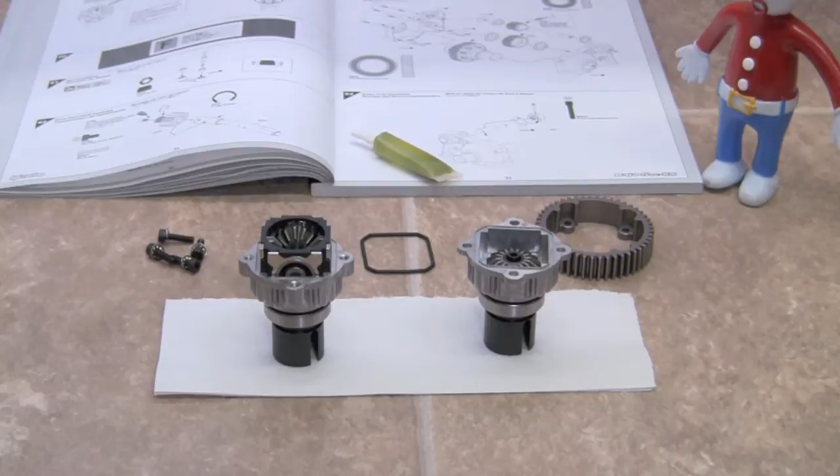Step number 59, which is filling the diff and putting it together and screwing it together. This can get messy, and sometimes if you do it right, it's not that bad.

First thing we want to do, out of experience, is make sure that our plugs are in. Nothing like filling up a diff and having it leak all over the place because you forgot to put the plugs in. Second thing we're going to do, just like with any other rubber gasket, is lubricate it. You can use your diff fluid or you can use some green slime.

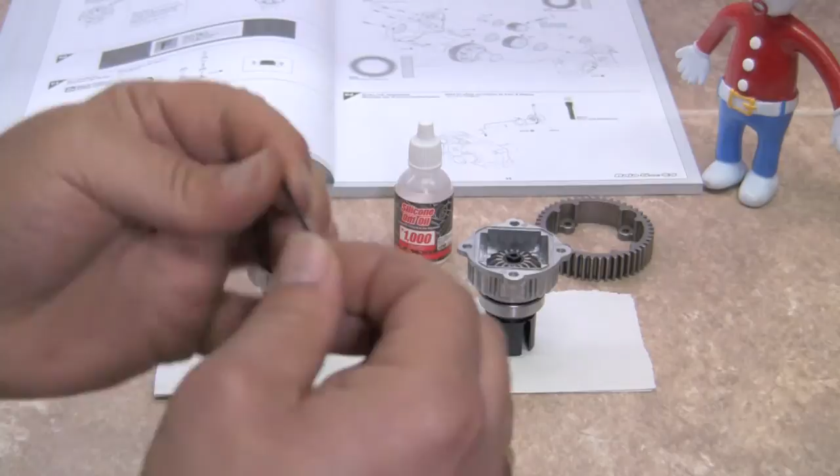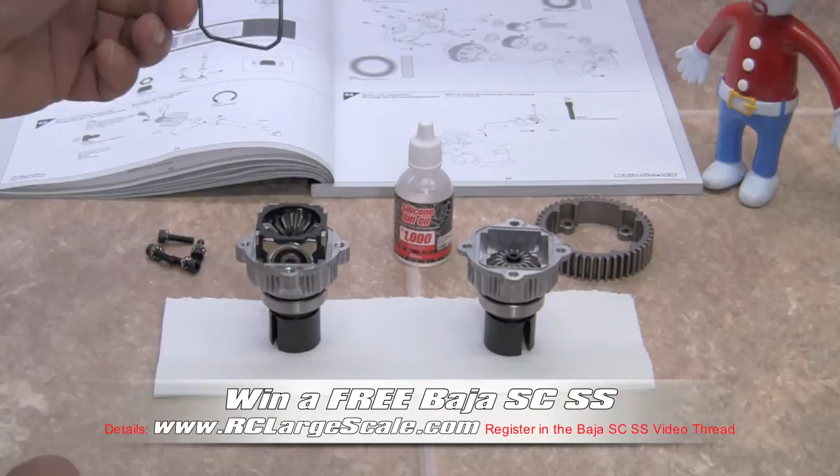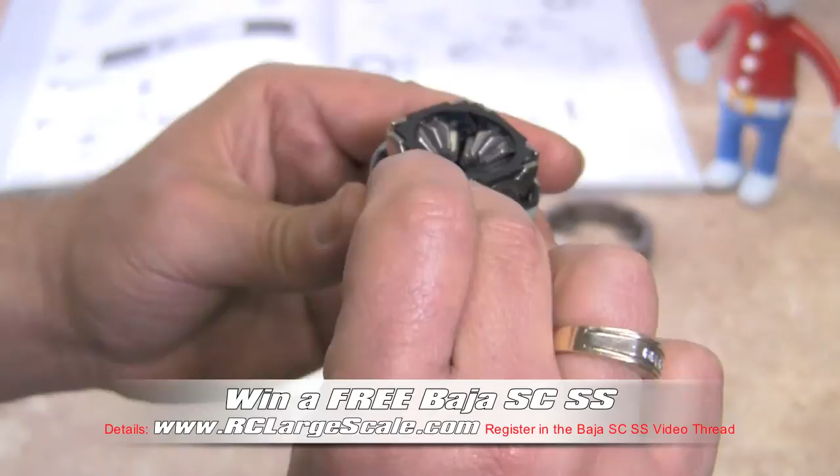We're going to go ahead and lube it up just like so. And as long as we have it in our hands, let's go ahead and lay it over the box, and it's going to drop down inside the little groove. What you want to do is make sure that it's actually down inside that groove properly all the way around.

The green slime or your diff fluid will actually help glue it into place. We may have to revisit that later, but we'll put it on.

I've gone ahead also, because our hands may be greasy, and I've put the little lock washers on our bolts, and there's 4 of those. We've gone ahead and inserted those, gotten out our diff fluid, and we're also going to need some blue Loctite. Just to save time again, I'm going to go ahead and just put a little dab of Loctite on each one of my screws so that they're ready to go.

Let's open up our silicone fluid. Lots of choices. We're building by the book, so we're going to use the 1,000 weight, and that's about as light as anybody would go. The heavier that you go, the more positraction type action you're going to get, but you also do get more push in your steering. So do your research, and if you're doing anything other than normal driving, you'll probably know what diff fluid you want to use, but 1,000 weight is actually the best for just about anything.

We're going to put the diff fluid down inside the diff, and we're going to want to fill it up to basically the top. If you take a look at your crosshairs on your posts here, we're going to want to fill it up just to the top of the crosshairs.

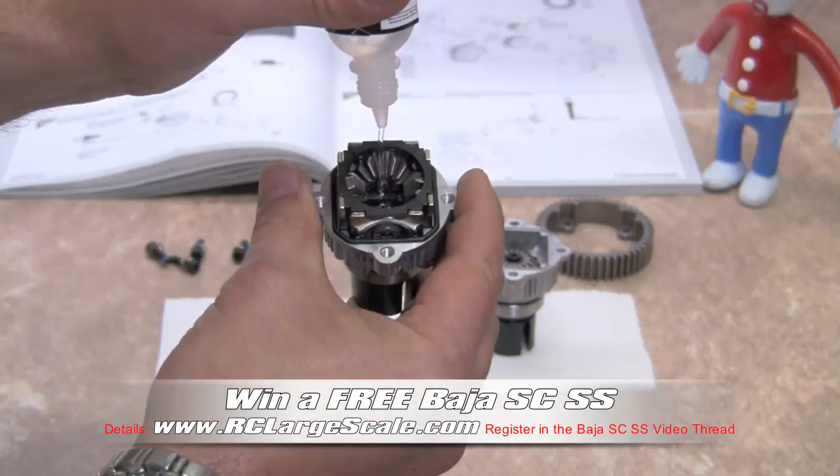You're going to want to do that until it covers the crosshairs, or right at. Another thing that you can do too to help it soak in is to move the gears around a little bit. You don't want to spin them all the way around, because then the fluid gets onto the gears and it's not going to give you an accurate measurement of how much is in there.

If you put a little bit too much in, that's okay, it's not really going to leak out. Let that settle in, and you can see maybe just right to the top of the crosshairs. Give it a couple minutes to settle in and make sure that you have an accurate reading.

Looking at my bottle here, it looks like we're using about half of it. Just to give you an idea, where's my hobby knife? I've got to cut the label off of this thing. Yeah, it looks like we're using a little less than half the bottle.

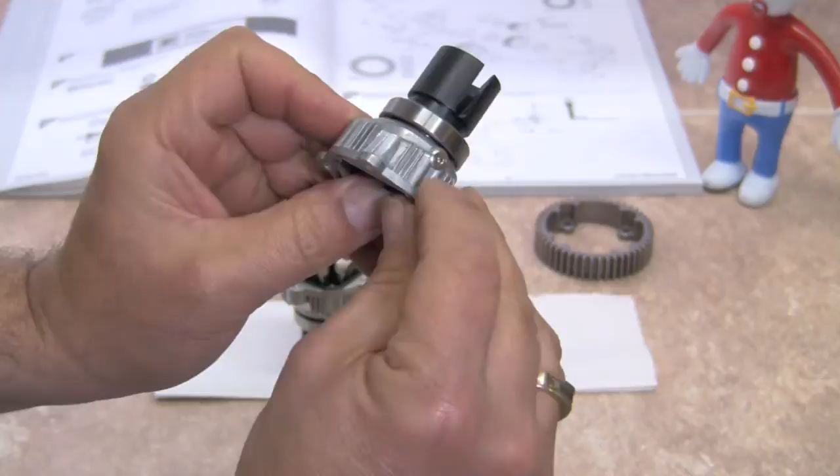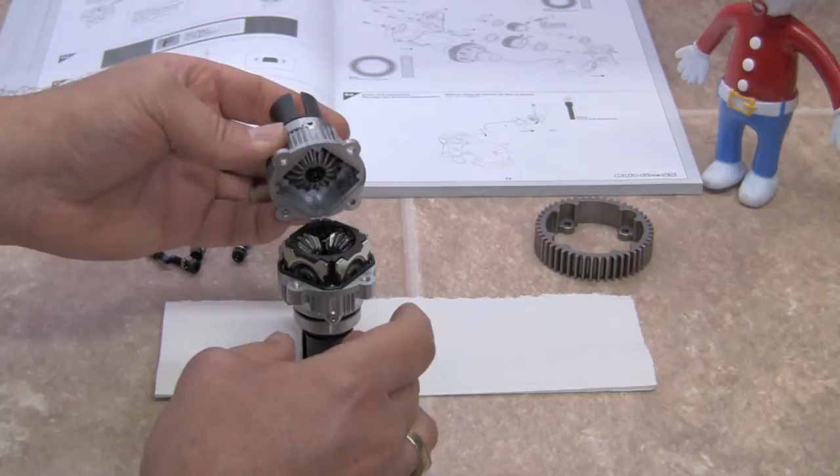Now that that's on, we're going to find the little plug, and we're going to grab our second half of the diff and find the little plug. If you notice, I hold my thumb on there so that gear doesn't fall off. We're going to align those up so that they're the same, and we're going to drop the gear.

I'm going to go ahead and drop this down on top. If that gear does fall down in there, that's okay. Just set it down, put it together, and make sure that you're aligned and that the diff goes all the way together, all the way around. One thing we want to look for is make sure you're not pinching that gasket. The gasket should fall down inside the groove on the top half as well.

These two are aligned. Okay, all looks good.

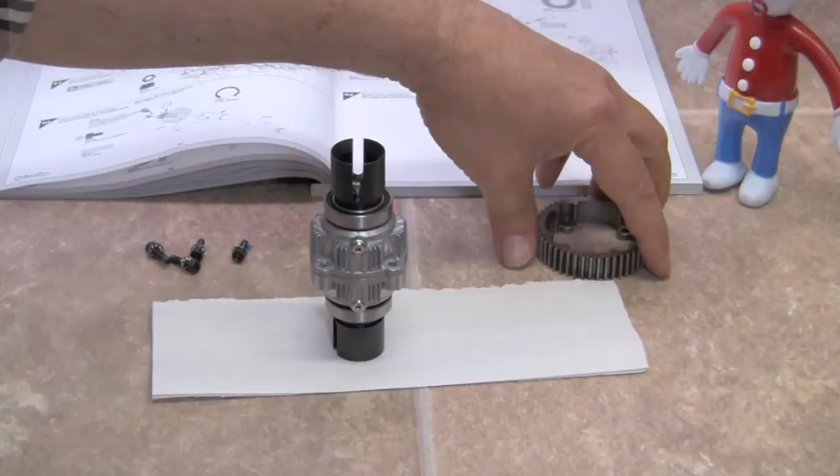Let's grab our gear, and as we look at this, we want to make sure that the diff half with the longer or thicker ear is pointing down.

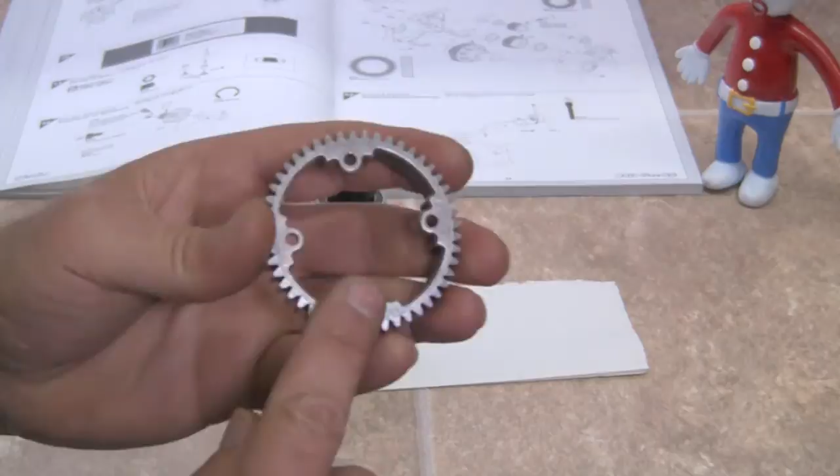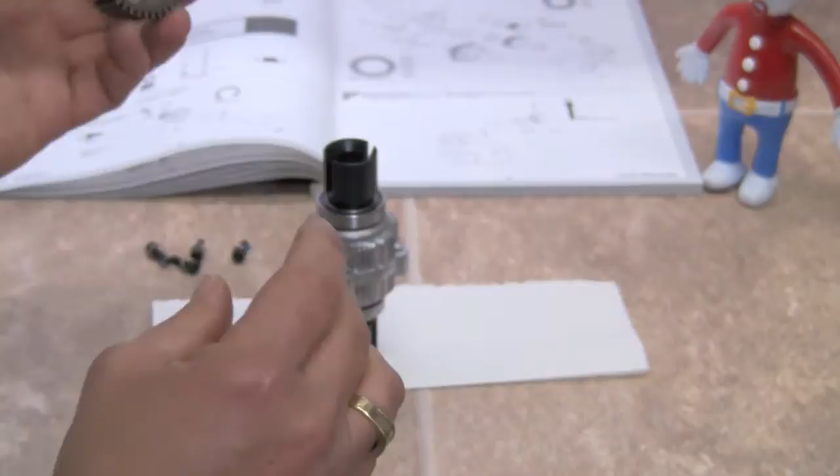Let's take a look at our gear. We have a flat portion here, and if you look at the inside, it has the little grooves for the ears on the diff case. So we're going to take the hollow portion here, slide it down over the top of the diff, and align the little ears up with the ears on the diff. Press down on it. That's what it should look like.

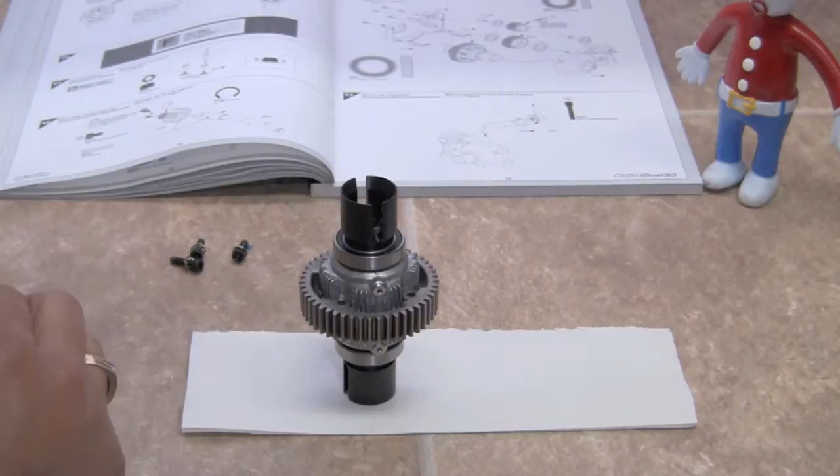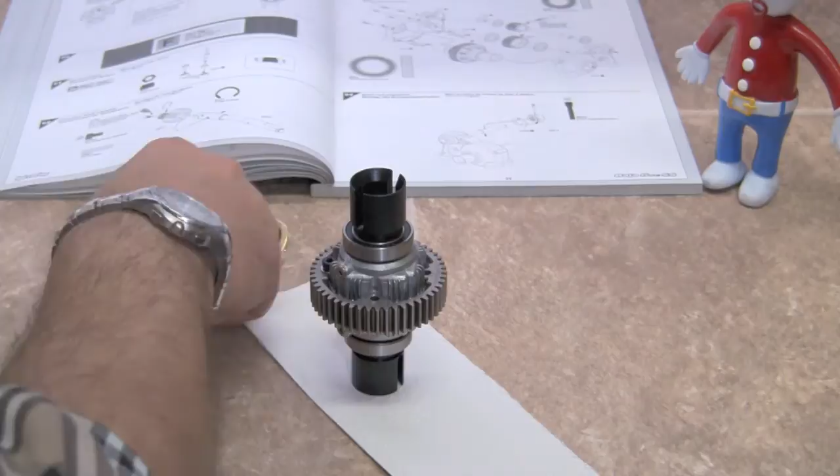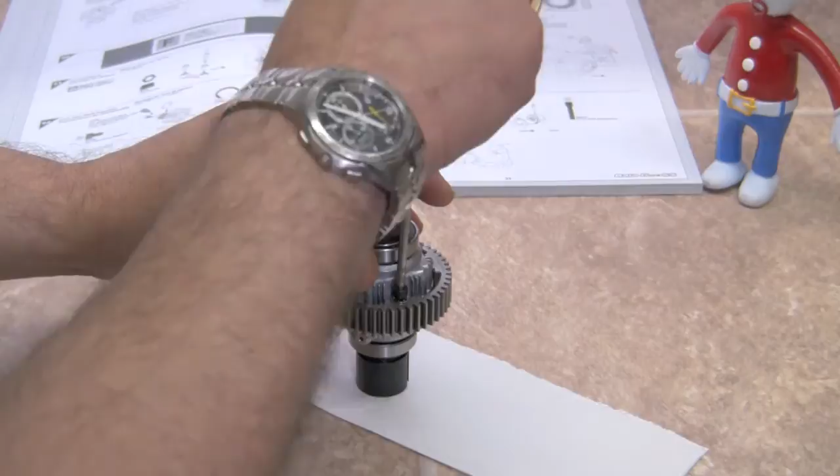Now we're going to go ahead and insert our screws. There's 4 of them. We're going to start with one and put it in. Screw it in just till it touches. Don't torque it down. If you haven't put Loctite on your screws already, it's pretty mandatory that you do that in this step. You don't want these backing out. Just till it touches.

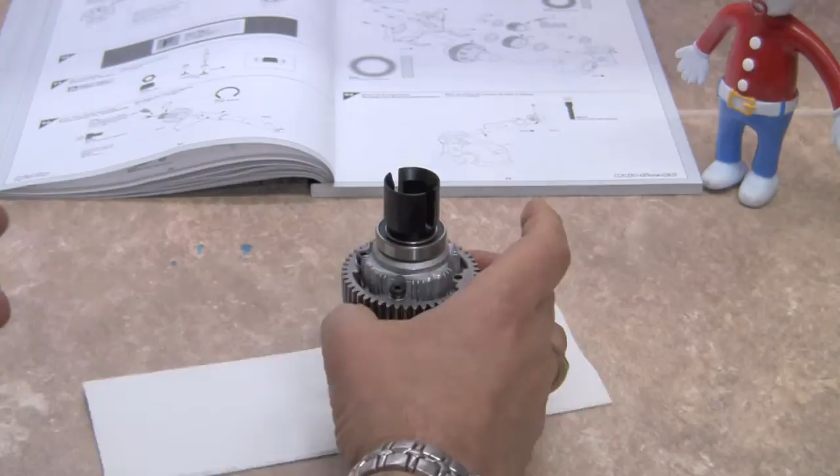Wow, we haven't spilled a drop of diff fluid. We're doing good this time around. It can get messy, especially if somehow you mess up and you have to take it apart once it's full. Not something you really want to do. But it looks like we're cruising right along here.

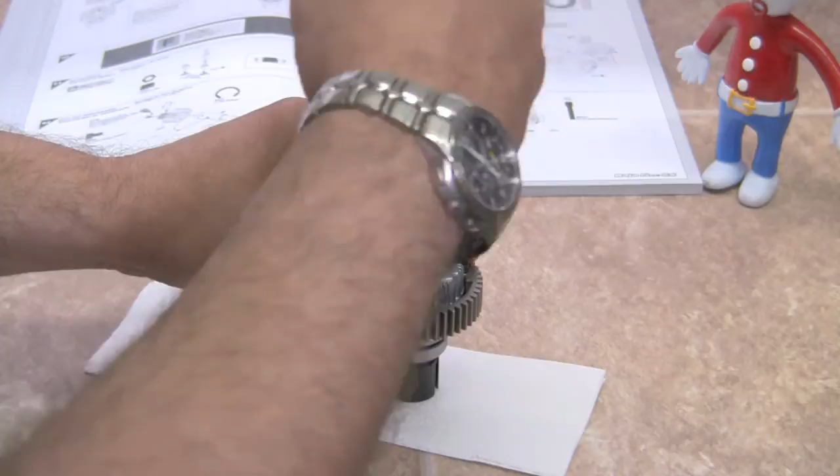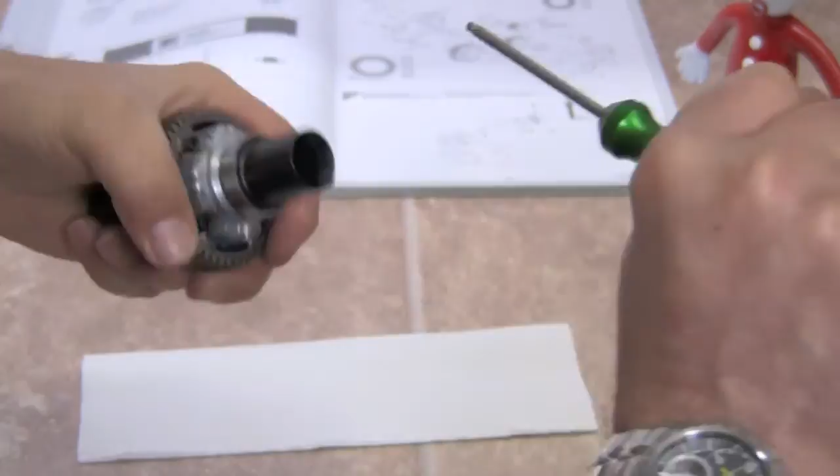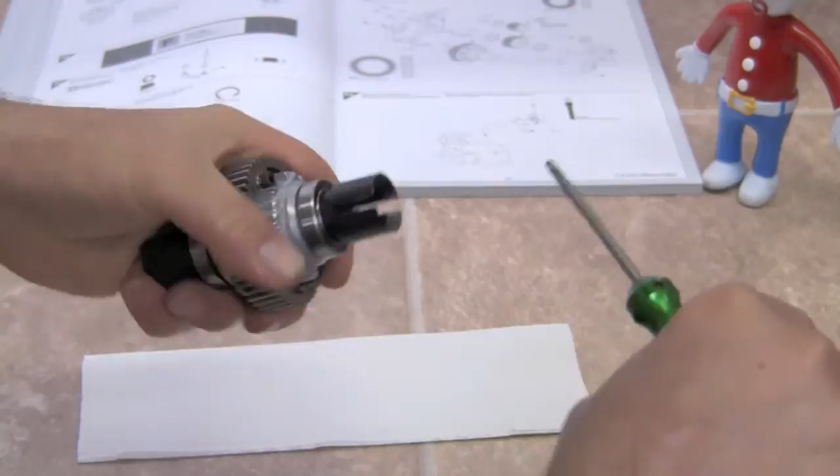Now that we have all 4 in, we're going to go around in a back and forth pattern and slowly tighten them. What we don't want to do is just tighten it up all at one time and warp the diff case, until they're all snugged down. Don't be afraid to torque these down, but keep a good feel on your wrench so that you don't strip out any screws.

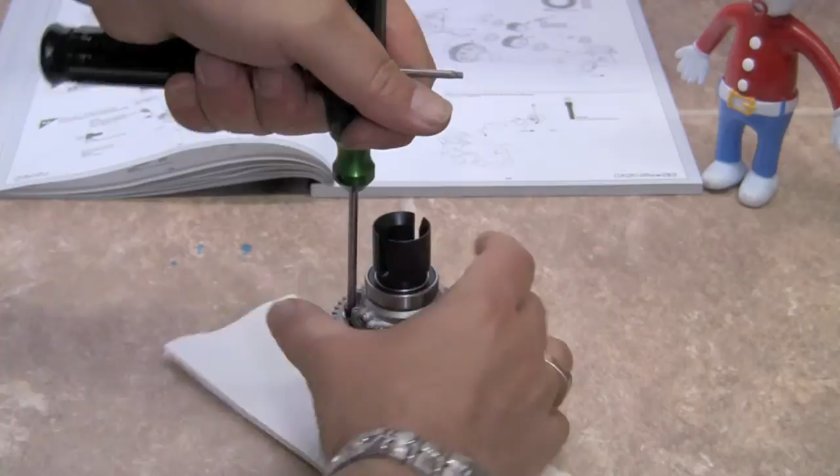And that, my friends, is how we build a diff.

Last thing that we're going to do is check for any binding. If it's all functioning properly, we're going to move on to build the transmission. How we're going to check it is we're going to grab both halves and move them just like so. Should be nice and smooth. You shouldn't have any bump, bump, bump, bump grinding. However, you will feel a little bit of grindiness in there, which will go away after the first couple times that you run it. It should move nice and smooth. This one feels real good.

Okay, we've just built the diff. Let's go ahead at this point and get our pieces out for step number 60 and 61 and 62. Oh no!